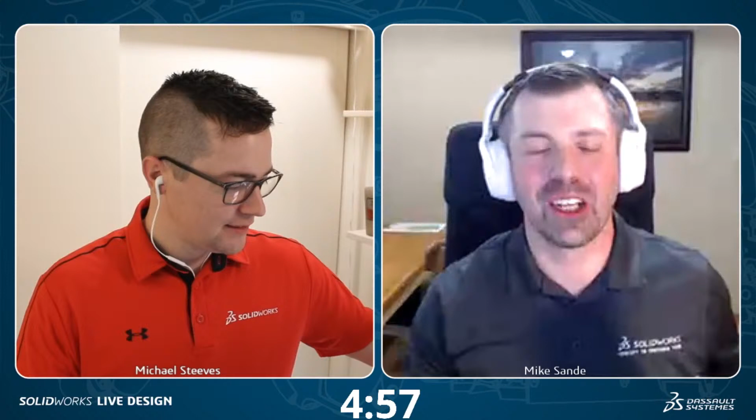Coffee water. Coffee. Some bean water. Electrolytes. Yeah. I do not have a backup today.

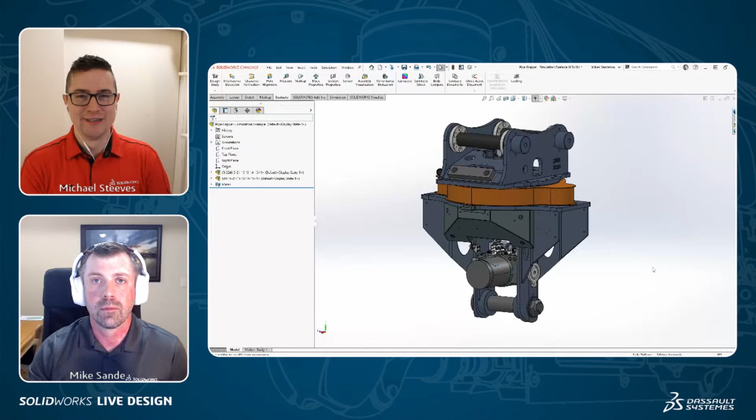Yeah, I'm thinking of some of the other projects I've worked on - the first one I think of is one of my first projects designing some lifting equipment. We weren't lifting pipes, but it was for lifting other heavy objects, and it needed, I think, a factor of safety of 10 for being an overhead device, and it was just amazing. Being the first project, the other engineers I was working with were attacking it in different ways. There's no way you can manufacture some of the things we were coming up with, right? Because that's the other challenge - sure, you can design it to be strong, but is it manufacturable?

So we can talk about that on a future episode. But yeah, today, like you said, it's all about - okay, we have an existing design.

We need to get some simulation results as fast and accurate as possible. I think of Model Mania. If any of you are familiar with it, it's a design challenge that's happened every year at SolidWorks World and 3D Experience World for over 20 years.

The situation is, you sit down, you get a drawing, you make a part. After you make that first part, you're given a change, and the fastest, most accurate time wins. Just got to go, right? I don't care, I'll hack at this thing. I just need to get the right answer because the clock is ticking.

And it's the same thing here. We have the production model, it's detailed. Now we just got to get this verification so we can go. We'll hit on all that.

All right, so should we take a look at the model? Yeah, where do we start? At this point, again, this is just a sub-assembly, but this is their production model. The first thing I always do when I'm putting on my analyst hat is really start to look at it.

If you've got a little background in CAD, you can start to look at how this is actually put together. This particular model, as we go through and investigate the tree a little more in detail, we see that they've separated out all of these plates to the stock material.

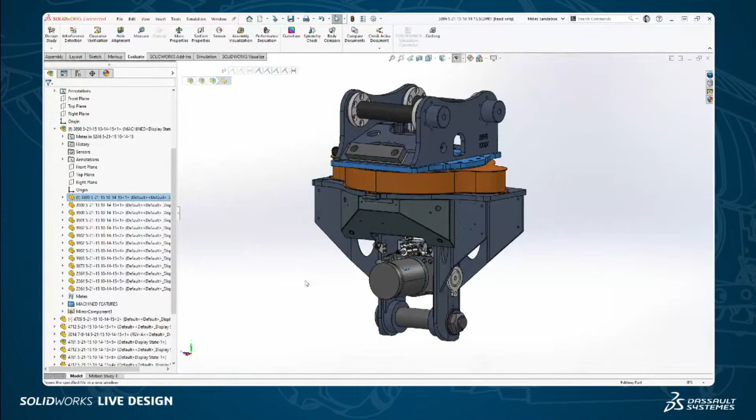So if I open up this particular base plate, this is a 2-inch thick, heavy stock material that they're going to use maybe a water jet, plasma cutter, probably a plasma cutter, to get this thing cut. 2 inches thick, that's crazy. I can't imagine what that thing weighs.

And then in the next level up in the assembly, I've got some display states that are going to be popping around here. You'll see that they've actually added all the machine features into that subassembly. So as an analyst, spend a minute and say, well, what can I right away get rid of, just by suppressing and so on. I'm going to skip this part because I want to make it a little more difficult.

This is a very well modeled assembly. They approached the weldment side of this thing correctly. They have the stock material, they have the machine components put at the right levels. It makes it manageable, but that's not always the case, so we're going to take a bit of a different approach. Just spend a minute, click around, take a look at it, see what's going on.

But the next thing I like to do is figure out my file management side of this with Sim. If we're doing that really fast, hack-this-thing-apart approach, we don't want to worry about making the CAD designer upset or completely blowing up the production model. So one way you can approach that is configurations.

I personally come in here and I'm going to do a pack and go. If you're not familiar with a pack and go, I'm working in SolidWorks 3D Experience, or 3D Experience SolidWorks Connected, so it shows as export SolidWorks files. On the desktop version, you'll be able to do File and just do a pack and go. Let me save this real quick.

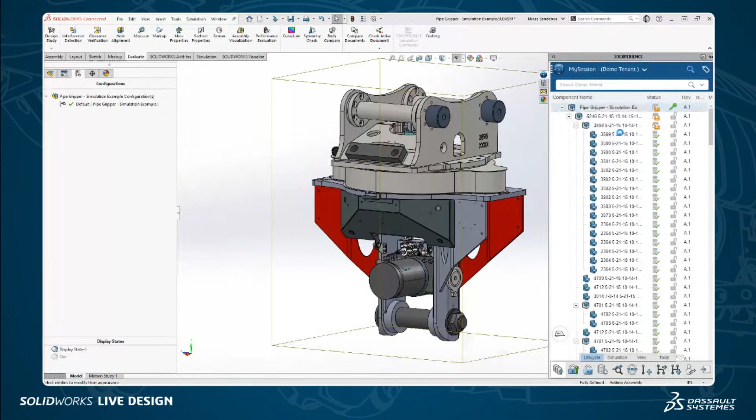That's a really good point, Mike, is that while you're doing that, the version of SolidWorks you're using is SolidWorks Connected, built on the 3D Experience platform. So your native save operations are kind of being done to that 3D Experience cloud platform. But you're going to go through some clicks, and I think you can call them out while you go through here, since I'm sure a lot of people watching use the traditional SolidWorks desktop. What would they click on as they go through it in SolidWorks desktop?

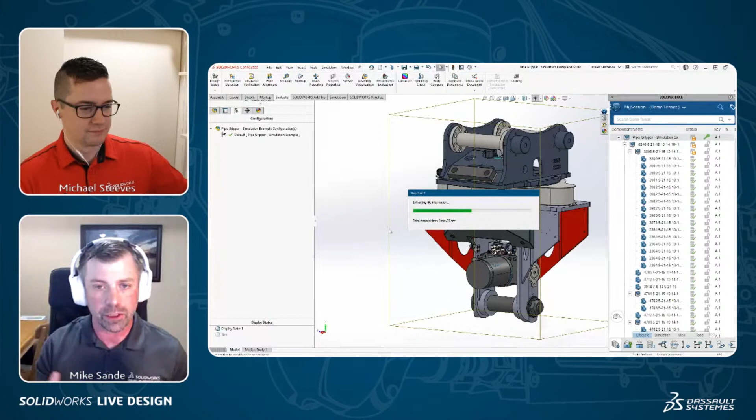I wanted to make sure folks out there using the desktop version get those clicks too. On this one, because all my data is on the cloud, that's what you're seeing on the right-hand side. The 3D Experience Connected side stores everything and has that version on the cloud, so I can get it anywhere, pull it down. Right now I'm just making sure this updated version reflects some changes I made this morning, that's why we have to make this save. But then I'm going to export these out.

So even though this connected version, which is still a desktop, this is running on my desktop, just connected to the cloud, to my PLM system there. Yep. We can still take and export this out. So the pack and go.

It's a really creative thing that happens there, in that when you have to do an export, it checks you. It says, well, if you want to do an export, we want to make sure that this is an accurate export. Like, have you saved the proper changes internally before you export this, so that at that time you have a one-to-one? But of course, everyone knows, as soon as you either print a drawing or send something out, it's kind of immediately out of date.

Yeah. But for this purpose that we're going through, sure enough, we're kind of ripping that out. We're going to be hacking and slashing away at it to do this as quick as possible to get to some simulation results. So this is going to be exciting. Yeah, it even just prompted me and made sure I reserved all the components. That way, if no one else was working on it, again, making sure latest and greatest.

So what you see here, this is the pack and go dialog. This looks the same on all the versions that are out there. But I always recommend go through and add a suffix to it. We're grabbing all these referenced files, and they could be all over the place on your server if you're using that, or in SolidWorks PDM, which manages those references. And I like to make sure we're creating a new unique name to those, and then putting this somewhere very safe. Again, we're trying to completely cut the tether to the production model, and we're putting that over.

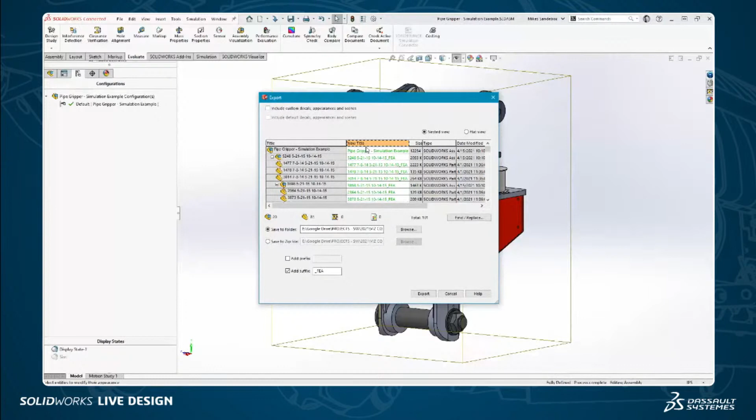Now, Michael, you and I were talking about why is this good? Why is this bad? And I think one of the things I really want to focus on is this method is really intended for that kind of ready to go to production. We need the final check in Sim. As you're evolving the design, simulation comes into play a lot of times to be able to do it with that design as it gets to this point. If it's just that final sign off, are we good to go?

Grab this. We're creating just a verification model to run the simulation, run the report, and then attach that over to that final. And you can zip that up, bring that over to the production model and have it as a reference as well. Yeah, and we're kind of approaching this internally as if this is our own company and this is the model that we're working on. But I could imagine, similarly, if you've contracted with someone out of house running the simulation, it's like, okay, pack and go, here you go.

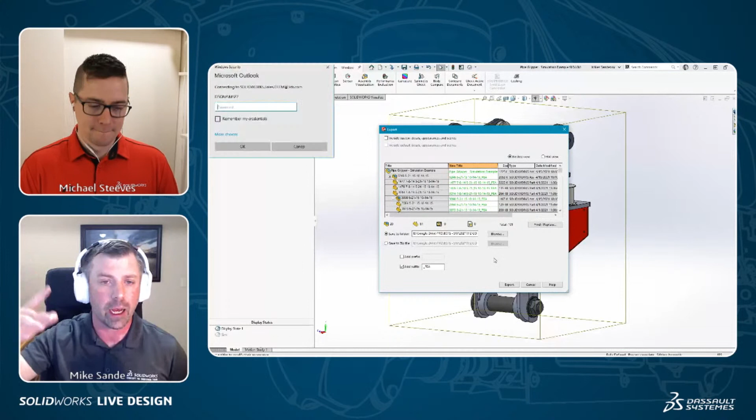And I can't count how many times it's happened to me that I receive an assembly file and it's just the assembly, it doesn't have the parts inside. So that pack and go is a great solution. Pack and go is the solution to package everything up, make sure you get all those references. Yeah, and you'll notice on the desktop version, there's some options too, like include toolbox components, include decals and stuff like that. So you can just make sure to walk through those as well.

So I'm not going to do this step. I don't need to. I just want to make sure you guys are all aware. It's worth the extra step in time. Save this out to a folder, to a zip, add that suffix, and just double check that the new title has been brought in here. So that's Pack and Go. Awesome tool. Has a lot of uses outside of this.

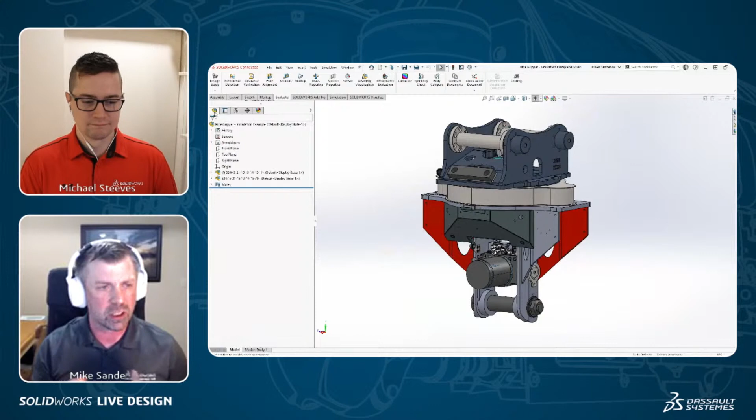Now, once we've got this ready to go, the hack model, right? Ready to really just dive in and tear this thing apart. I've looked at it. I've understood it. Where we started to go with this one, especially with the whole assembly, was suppressing out the components we don't need. And a lot of times it's just figuring out, what don't I need? A lot of times we're going to replicate fasteners inside a simulation. Large pins can replicate it virtually.

But in this case, if I zoom in, we have a lot of things like the hydraulic manifold. I'm not running a sim on that. The mass, when we're looking at tens of thousands of pounds of force, that hanging there is not going to make much difference.

Some of these are pins and clips. So all of that stuff, right? That's just adding complexity to the model that when we go to sim and we need to create the mathematical form, or you guys probably all heard the term meshing the model, you don't need it. It's just adding time and computational time and going to give you struggles. So we're going to get rid of it.

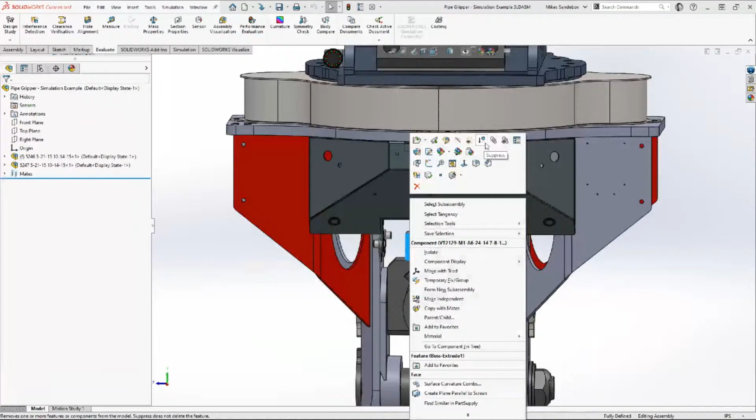Now, here's a trick that I learned. My first big trick to show is instead of going through and suppressing these out, which I think most of us would probably attack, what I'll do is actually hide them. The reason I start doing this is it's faster to unload these from your graphics card, which is hiding, versus having to suppress it, which is clearing it from the memory. In large assemblies, when you're doing this in bulk and you have a lot loaded to memory and you're unloading stuff from memory, every suppress, you're going to notice there's a little bit of a time.

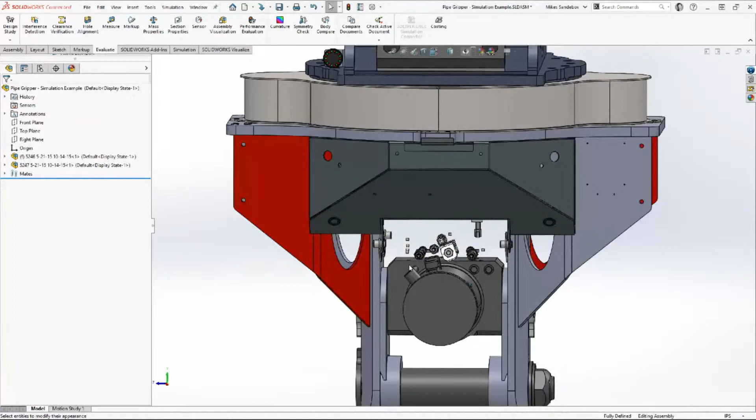Yep. So doing things like click on the manifold, I use a right click menu. You can take and hide component, or an awesome hotkey is just hitting tab. Tab and you'll notice, hide. Tab to hide. And you can start to just go through and tab out things you don't need. Like I'm going to replace out a lot of these washers we definitely don't need. And this is where you can start to be pretty quick.

Just tab, tab, tab. Then you get other tools like being able to do, for users out there, left to right select. If you're not aware, that's a blue box. Left to right or blue, that's everything inside. Right to left or green is everything it touches. So having that tool, right click and hide that out.

Again, just using my tab, and a combination of these, I can start to go through and just get rid of all of these components. It's a much faster workflow in large assemblies to get rid of the extra data that we don't need. So this is good.

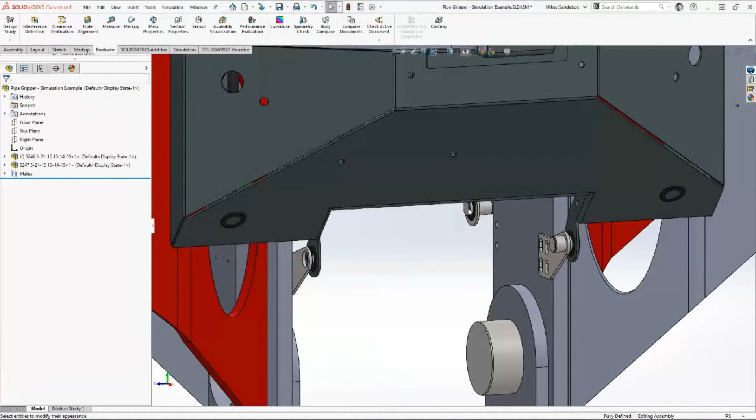So you talked about hiding components, but I just want to rewind for a second for every SolidWorks user out there. If you didn't know about tab to hide, and if you do, go ahead and give us a +1 in the chat. Or if you didn't know about tab to hide, just let us know that, oh my gosh, you can hit tab on the keyboard to hide a component.

But what's the keyboard shortcut to show? So maybe you get rid of something, and in this case, a big structural component. No, I needed that. Shift tab, right? So you hover over that spot, shift tab will bring it back. Just know those two: tab to hide, shift tab. And this works in multi-body, which we'll get to here in a little bit. But for me, I love using tab to hide. I use it all the time.

Now, Michael, I got one for you. What if you do a bunch and you don't even know where to hover over? How do you get those back? Oh, let's see if I remember the dexterity. Is it Control Shift Tab? Control Shift Tab. Yep. Got to hold it. And then you kind of get the temporary display of all those components, and you can click on the ones that you want. Yep. Right?

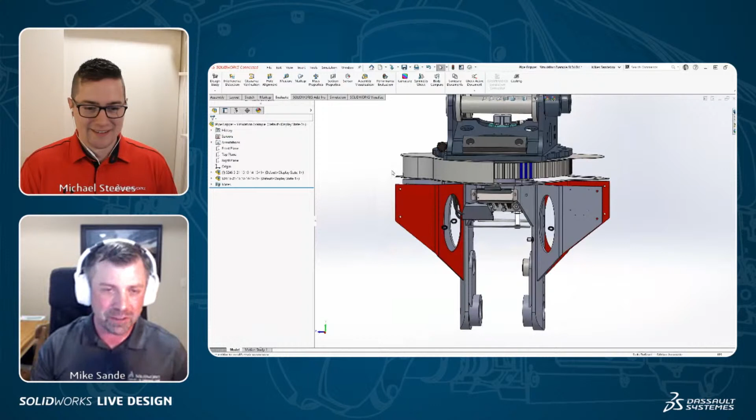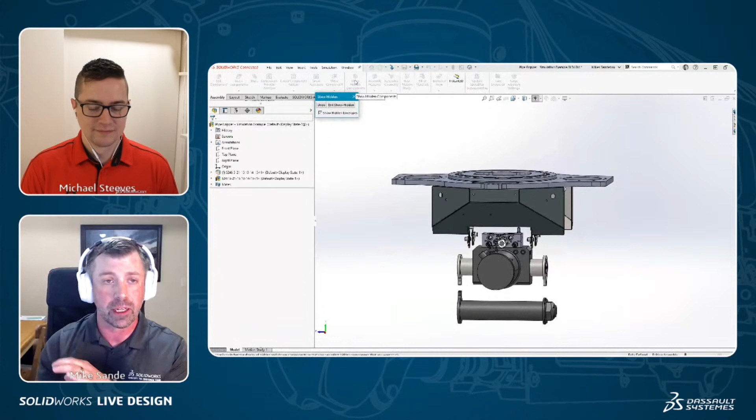Okay. That's right. So Control Shift Tab is a hotkey. And what that does, I'll do it again here, is that will temporarily bring up items that you may have hidden, and you can just click it while that's active. I think for the users that have been around for a while, you all know the show hidden components as well. So on my assembly tab, what this actually does is it inverses everything. And here's kind of a gut check. Did I hide something? Well, the main structural plate.

So once that show hidden is active, then when you select on a component, this will actually bring that back from that hidden state. So again, a couple different options: just Shift tab to bring it back, but you got to know where it is. So like I knew this one was right here. Control Shift tab to temporarily bring them up, or just the hide show, and then you can click them.

All right. So while you're cleaning some things up there, there's some good dialogue going on in the chat right now.

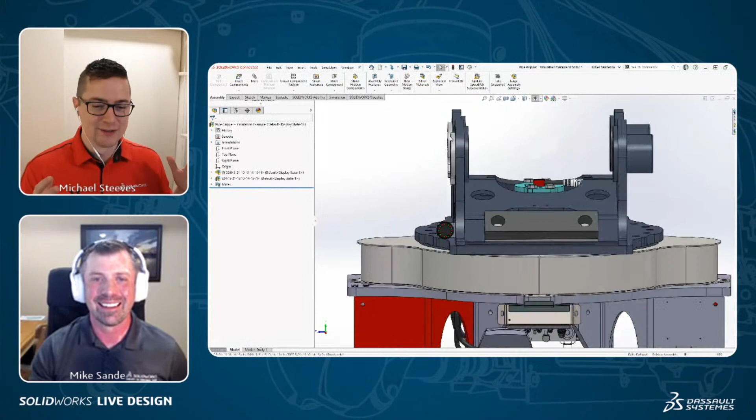Good. What's the best way to cut material? And I know Eric's in there. He's repping the Omax. That's actually something that we featured in a previous What's New. So you can see kind of a whole string of content in SolidWorks What's New using the Omax water jet machine, awesome technology.

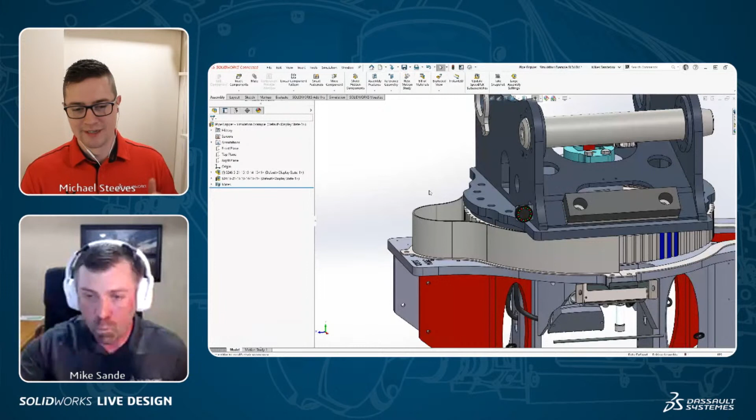Yeah, there's also, going back to the 3D Experience platform question of how secure is the cloud. If you have that question, Mondo, I see you there in the chat, head on over to 3ds.com. There's some white papers that talk about the security and how Dassault Systèmes is implementing state-of-the-art leading technology to make sure that, even if you're on the 3D Experience platform on the public cloud, if you set up your own environment, it is secure to you.

Of course, if you need additional security, there's on-premise solutions and different types of configurations for that if necessary. So it comes in different flavors, I guess I can say it like that, to hit the security benchmarks that you need.

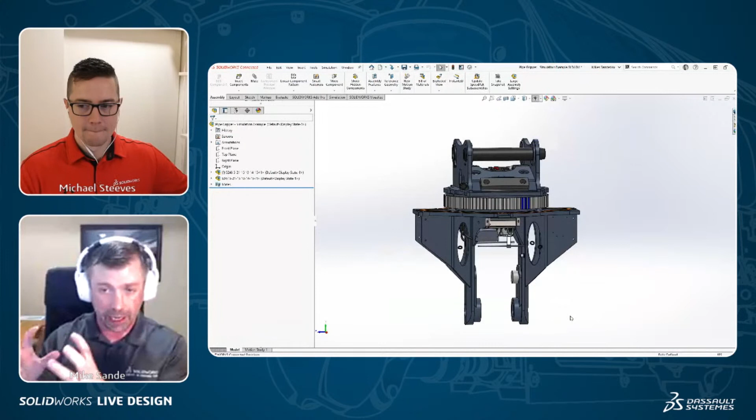All right. So Mike, there's a lot of small components in there. Do you have any other tips for how to easily select some of these components or find ones that we may not want? Right, because speed, we don't want to sit here and just tab. That method will get you a lot of the bulk stuff, right? This whole hydraulics unit that was hanging off the bottom, I can just window select that, tab out some of the bigger things. But I don't remember when I ran into these selection tools, which have been added to recently.

Even recently we had the select identical components, but check these out if you're not familiar with them. If you're using Toolbox today, you can just group and grab all your Toolbox items and do one big hide or one big suppression, select by Toolbox. I love the select by size. This is probably one I use very often. What this does is it looks at the overall assembly and it does a percentage of that size. I believe it's based on bounding box, but correct me if I'm wrong. I'm not 100% sure.

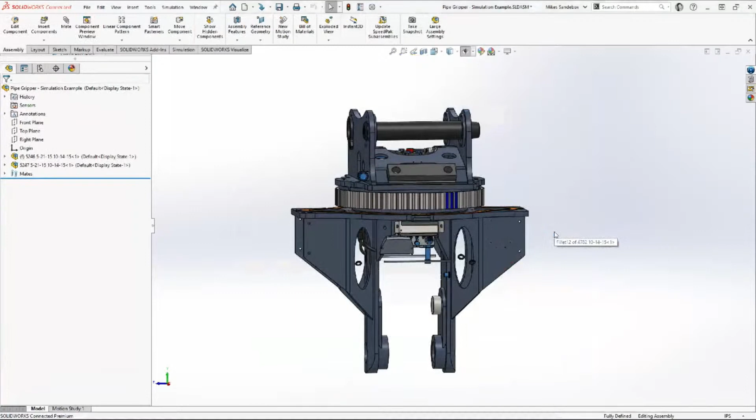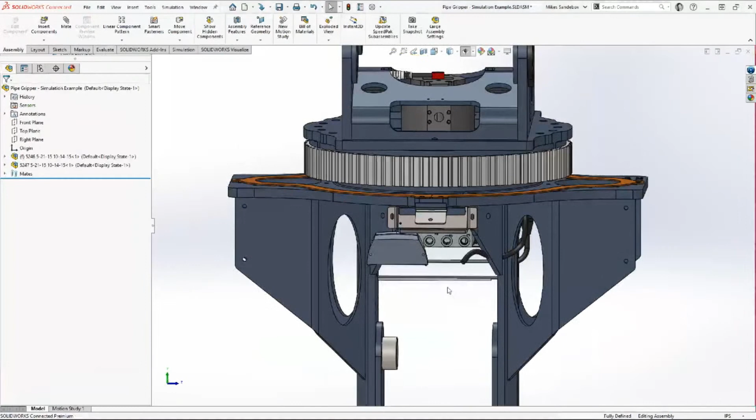But anyway, that will just grab any of these smaller components, which in this case, structurally speaking, we're not going to need. We'll need fasteners, but we're going to replicate those virtually in simulation. So I just use that select by size, and just like that blasted out a bunch of small little things, getting me down to going back to my tab key, tab, window select, and so on, to start to hide these out. So great question. Again, these are components that don't influence much the structural integrity of what we're going to analyze today.

If there's anything you question, bring it along, right? As we go through this workflow, my end goal here is to actually create another version of this, a multi-body part. So if you're questioning, do I need that or not? You can bring it into Sim. You can run an analysis with it and without and see if that actually affects the overall displacement or stresses of the part. So if you're questioning, hey, maybe this pin, does that affect the overall displacement? It might not. You can always bring it with you.

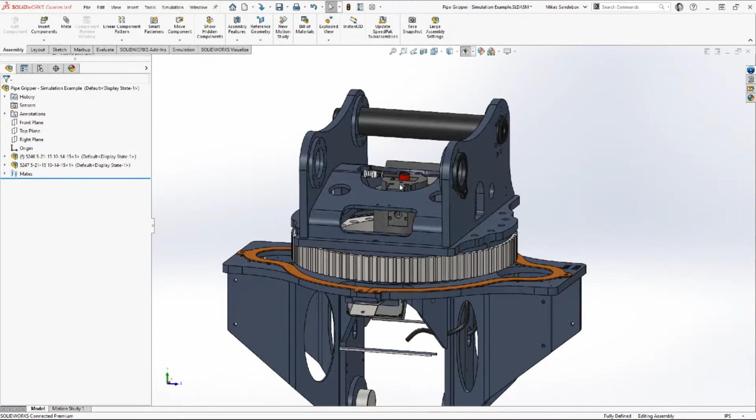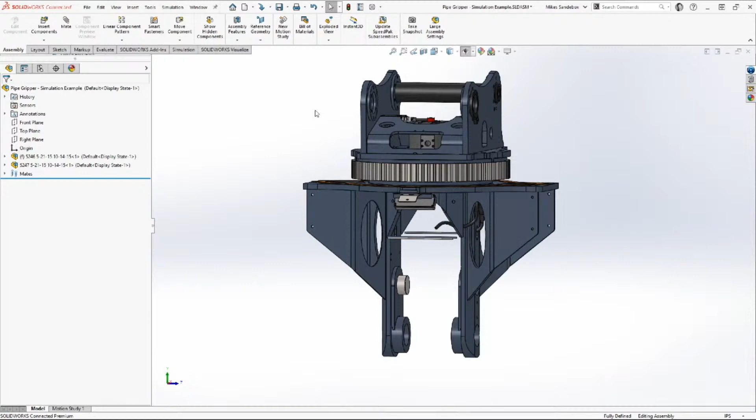Yeah. And as a simulation user myself, I've run into many cases where you start too complex and you're trying to troubleshoot the model. It's always easier to start simple and then add complexity from there. Would you say that's fair? Crawl, walk, run. Yep. Crawl, walk, run. In a sim, get down to your structural side of things. Let's get it to run. Are we getting some sort of results? Does it make sense? All right, now let's start to add in that complexity.

So Michael, we talked about the pack and go up front. I think another very common tool is to create a configuration. If you're doing part simplification for FEA, you got a complex single bracket, but you want to get rid of holes and fillets and those things, configurations are super awesome. In this workflow, what I found super handy, because we're hiding, is display states.

So if you guys aren't familiar, under configurations below that are display states, and these are really intended to manage the look of that, but it'll manage what's hidden and shown, which is what we care about on this workflow. It'll also manage transparencies and so on.

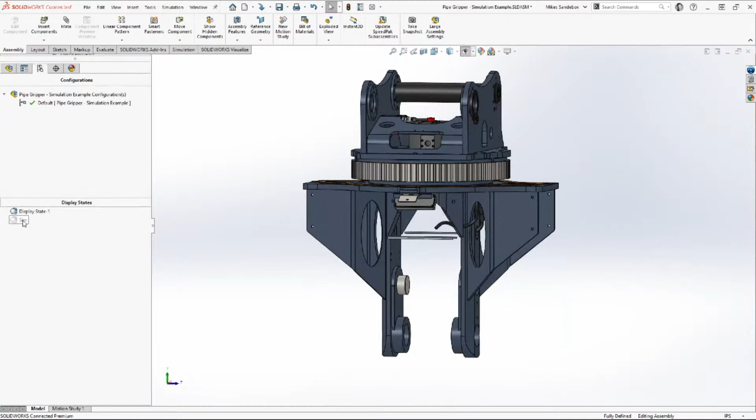So what I actually did is I created a sim display state right away, and I went through and hid all these components, and now I can toggle between that first display state, which would be everything shown, and now my sim display state, which is all of the stuff that I want to actually simulate. Well, it looks like it's even captured colors.

Yeah, so that leads me to the next part of this: we're going to create another part that we want to carry along in a simulation. What I've done here is I've added some red to these plates. I got two that are colored. We won't color the rest, but really the objective is, now that I've got it detuned in terms of complexity on the assembly side of things, I've got all that stuff gone. Now it's understanding how I want to set this up in simulation.

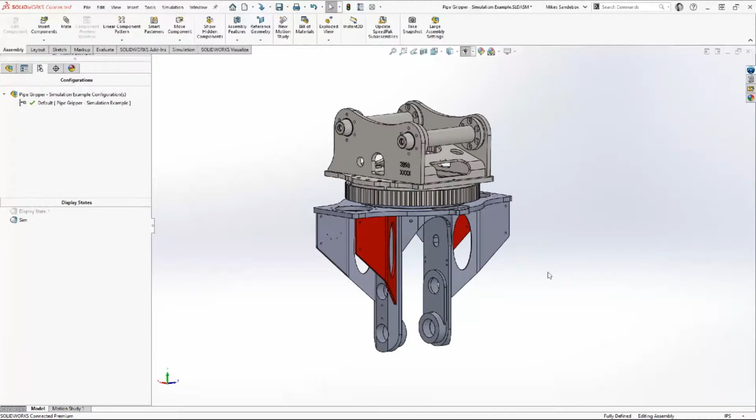And Michael, you're a sim guy. On the mixed meshing thing, do you want to explain that? I know you did a job with it. Just one moment before we get into some of the meshing conversation. I just wanted to plug display states one more time, because you're using it to control what's hidden and shown, and maybe do a little bit of color coding for managing the model.

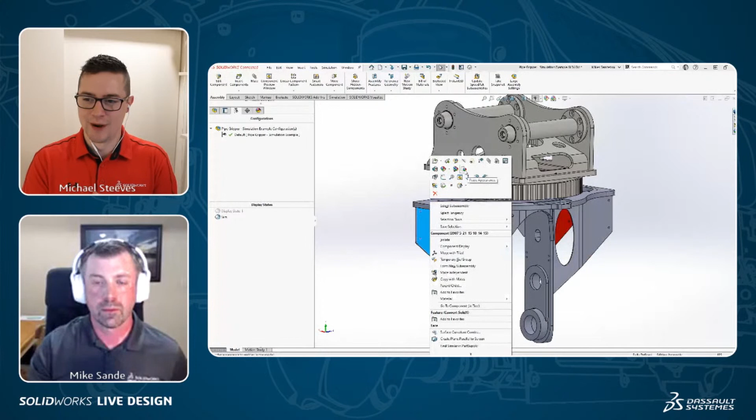But one of the other big benefits of display states is, I've seen many times, a lot of people create configurations when they're not necessary. Display states are a faster, lighter weight way to control hide/show as well as color states. Mike's doing some of that here. But if you have a product and you want to show how it may come in different colors, display states is the way to go. Like, I got a green version, a black version, a yellow version. Display states is an easy way to capture those visual properties without creating extraneous data.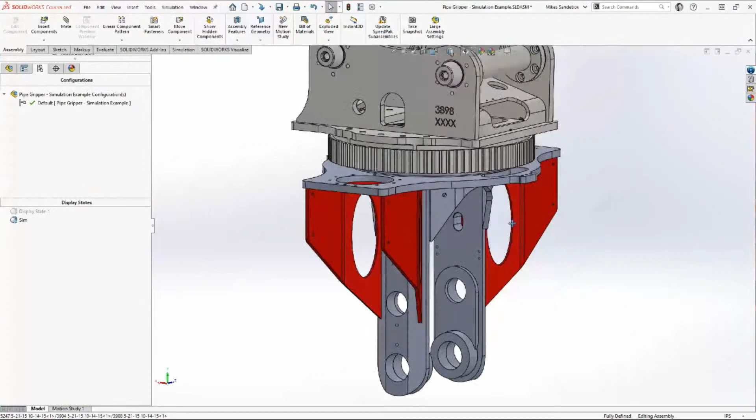They solve fast. They're very efficient. And in this case, I'm just kind of going through and saying, well, these plates, these ribs, are all about the same or they're all the same thickness. So stock plate material. So I'm just making a note just by coloring it red.

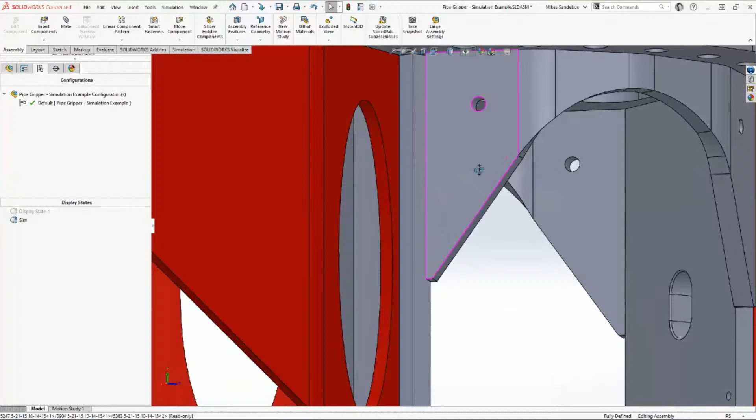This giant plate here, that was that 2-inch thick stock plate that came in that has actually been machined down. You can see how they've machined off the top of this, not uniform thickness. So that one's going to have to be a solid element. This plate here, this is all uniform. This is actually a 3/4 inch. So I may just take a second, come in here and grab that body.

You guys are learning how the appearances apply. This is a really nice little reminder of the hierarchy. So right now, part is at the very bottom as the lowest priority when these appearances come. So I can leave that gray on there. The actual body itself, then the feature, then a face, and then the assembly. That's how appearances override. So if you're ever playing with these and you're confused, I just colored this pink, it's not turning pink. Click on it. You can check the hierarchy and see where those colors are.

So in this case, like on the body, let's go ahead and click that. That'll bring up my appearances on the left. And we'll just say, hey, 3/4 inch plate, we're going to call that green. All right. And click the OK. And now that's applied. So this doesn't have a lot of different thicknesses to it.

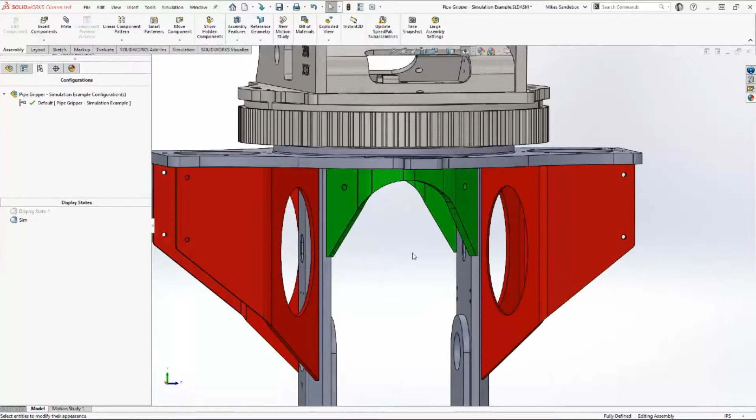But it's just kind of giving me a game plan, because my next operation is creating an actual surface body to represent those. So again, I'm thinking ahead. I'm not in simulation yet. You can do some of this in simulation, but we're not using a license yet. I'm using all CAD. And now I'm going to actually create a variation of these with some surfaces.

All right. Before you get into surfacing, Mike, I got to ask our audience, because we're going to cover some configuration in the SolidWorks options, and there's a setting there where you can change the open edges of surfaces.

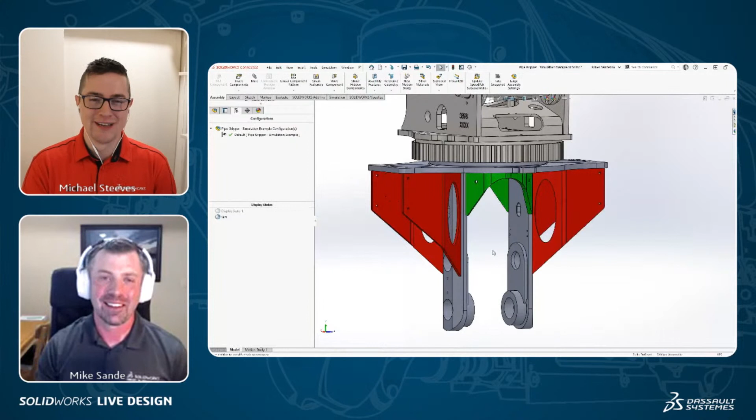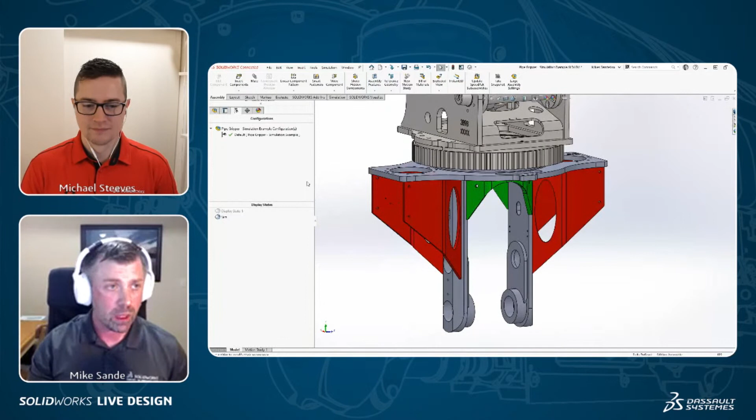So, just to back up, we've detuned this, got rid of all this stuff. Now we're starting to strategize our mixed mesh, solids, shells. What am I going to use to speed up that program? I've painted these to say, hey, this is 1/2 inch plate steel, 3/4 inch plate steel, make a note, go through. Now it really comes into creating that surface variation of it. You can do it in sim. To me, this is the better way to do it.

So what I'm going to do is come in and actually create a new part. We're not going to do anything to the basic one. And we'll just call this shells. We'll save that new part. And now I've got a part I'm working in context of the assembly. This part is going to build all the representations of the plates in that shell form, or that surfaced form. So when I say shell and surfaced, surface is the modeling tool that we use. It's a shell inside a simulation. So those work interchangeably.

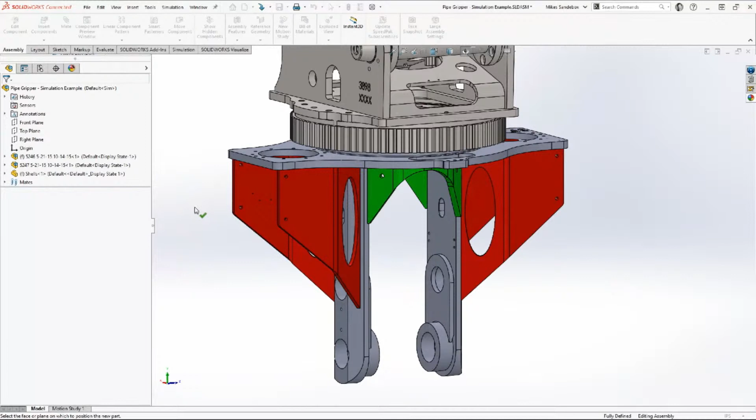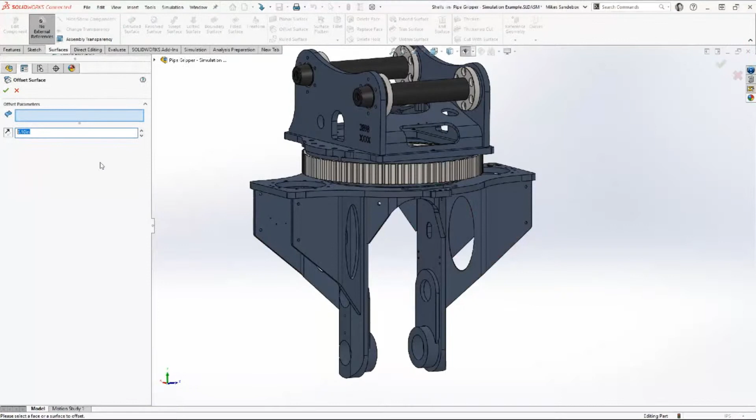So new part, I'm going to be working in context of this part. Let's give that a reference to the front plane. And right away, I'm going to come up to my surfacing tools, and I don't need any sketches. By default, SolidWorks always goes to that sketcher. And we're going to start using the offset surface tools. I don't know why I lost my display states, but we'll just work through it. I know what's going on here. Since we're editing in context, it kind of paints everything else backwards. And you can force transparency and do other things like that. But you're getting into some offset surface.

Yep. So on this plate, these flanges are uniform thickness, and this was a 1/2 inch plate. So I'm going to give that a 0.25 inch. What I want to do is create a surface right in the middle of it. Simulation, in the back end, in the math, will add that material, but we don't need to actually represent it in the mesh. They can do it in the equation.

Because at this point we've both run simulations before, but if you haven't run a simulation before, and we talked about these different mesh types, there's still this outline question that we haven't been able to show you yet of how do you define if you're going to be solid, if you're going to be shell, if you're going to be a beam mesh type.

Those options we can explore later on, but you can right click on components, you can define shell by a solid face, you can right click on something and treat it as a beam, or toggle it back to a solid. So there's different techniques there to work with.

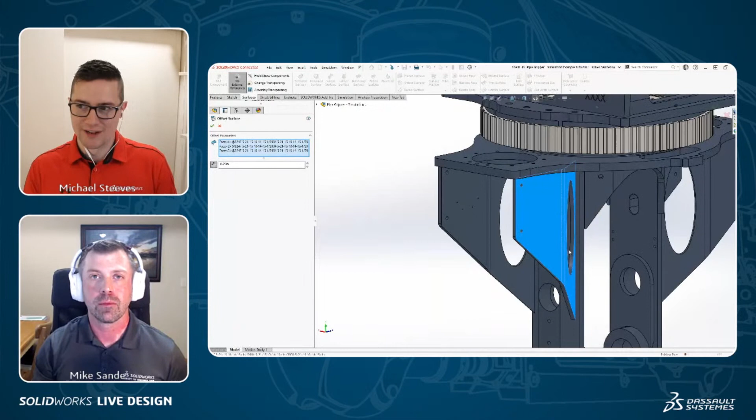What we're going through now is actually when SolidWorks simulation sees a surface, by default it treats it as a shell. That's why we're creating these surfaces. We don't have to go through other manual steps later. We're doing those steps now to prepare this model by creating some shells.

The other thing we'll show you with surfaces in just a little bit is we got to glue these things together, we're going to weld them in simulation. When I have this solid or this surfaced version of it, it's a lot easier for me to remember where to pick the edge because there's just one edge. We'll point it out too, but this is to me a really key part of the workflow.

So now it's just going through and grabbing what I know are uniform thickness plates that will be a great fit for a shell. And there are tons of threads out there on this.

You can get onto the forums, you can check engineering.com. We didn't invent shell elements or solid elements by any means, this is a common discussion in FEA. Just Google it, check it out if you're not sure, and you can learn plenty more. Obviously the SolidWorks simulation class goes very in depth into this.

So I'm going to go ahead and create one of those shells. Oh, hang on, I'll get it back. Yeah, okay, because it happens so many times where we get a pop-up and we move on, and then you ask the question, why wasn't it working? Okay, so let's see it again.

All right, here's a tip I want to show you though. Your enter key, if you're not familiar, brings back your last used command. That's really helpful here because it brings up that offset surface tool. Another tool I use here is the right click and then select Tangency. You'll notice it just grabs that whole tangency, come through again, make sure we're offsetting into the inside of the plate, and then click OK.

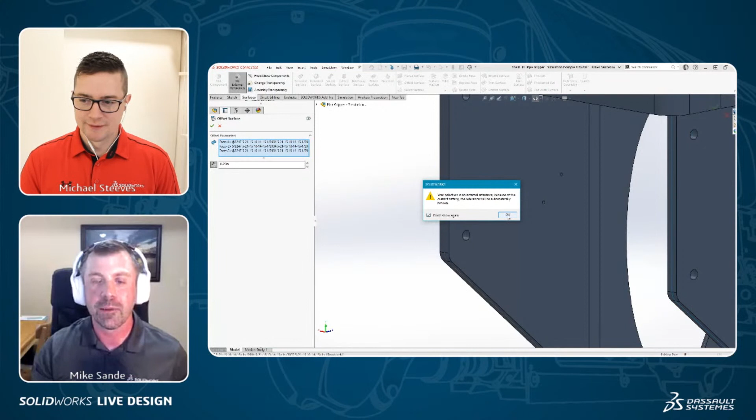I think best practices we often see when something is going to be released, you go through and break all of these external references. A lot of your CAD admins can kind of answer that, there's a lot of forum chat on best practices there. As a designer, I personally prefer to work with no external references on until I know I want that design intent, then I go in and turn it off, knowing that part's going to have design intent. So you'll get this, we'll ignore it for now. Yeah, that's a really good point because it's reflecting back on our initial challenge today.

It's all about performance and speed. Turning on no external references means that as you create other features and the model rebuilds, it's not having to check the assembly when it rebuilds these surfaces. It's just, nope, that's the surface, move on.

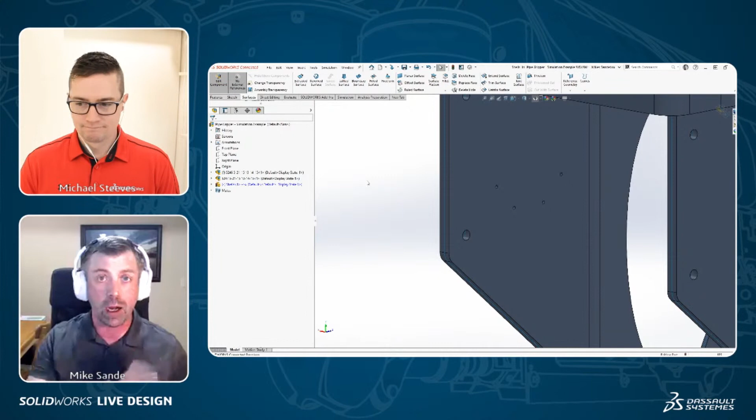So if you're doing this workflow earlier in the design phase and that assembly is going to be going through changes because you're doing the if-then type simulation—maybe the plate needs to be longer, wider, whatever—have that on and you get more automation. But this one, we just need to make sure that we're meeting that factor of safety of 5. So using these offset surfaces, I don't need to have that external reference turned on.

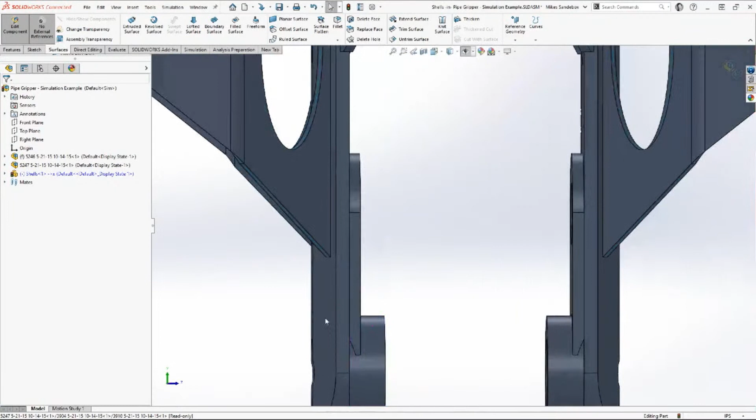Nope. All right, I'm going to create two more of these real quick. Again, just right click, select tangency. My enter key should bring that command back up—not doing that right now, no big deal. I'm going to do it for this plate as well. But what's pretty cool is, if we remember, one of the requirements was uniform thickness to use these. Not everything has that. The main tongue that comes down here, this main fork, is machined down. It's not uniform, so that one has to be solids.

So again, what's my strategy in sim? This one here, we could use as shells, so maybe shell that out. This part here won't do it, so there's definitely a mixed mesh—we need both the best of both worlds. This part here definitely could.

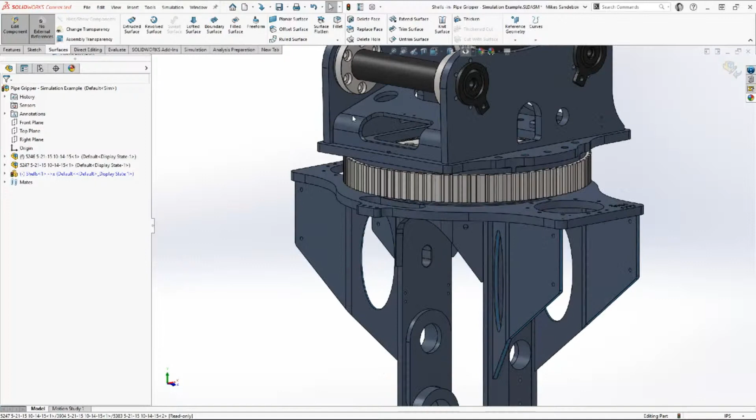Let's just do one more, and I'll show you what this is. It gets pretty cool. So if you are doing design where you're working with just a ton of stock sheet metal—sheet metal actually automates this whole process, but we don't have to get into that—what you can do is create this in-context assembly, start to create these offsets. And if we open this up, we now have this really nice variation coming together.

So I could go through and actually start building the whole thing up as a surface body. Now I've got this to use as my sim model. And if it's all uniform thickness, I could have skipped that whole defeaturing part because I'm just saying what I want for simulation. So opening that part is a good way.

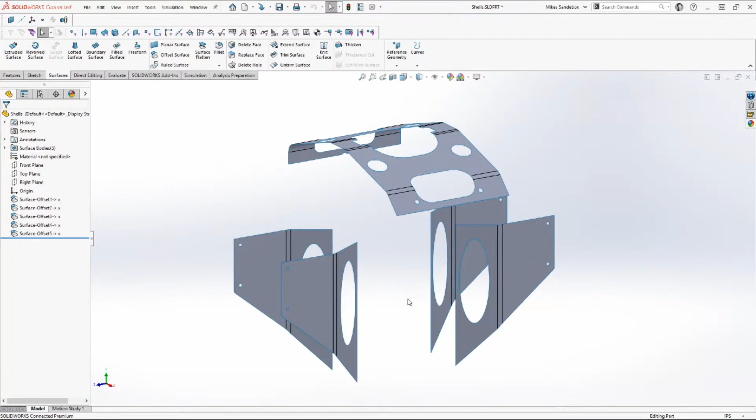I can imagine if you step away from your computer, either grab more coffee, hit the restroom, whatever it may be, other distractions at work, you come back—how do you know where you left off? Mm-hmm. We talked about some of those model edges earlier. Right now they're blue, and that's kind of the default color. Can we take a look at how a SolidWorks user would change those open edges?

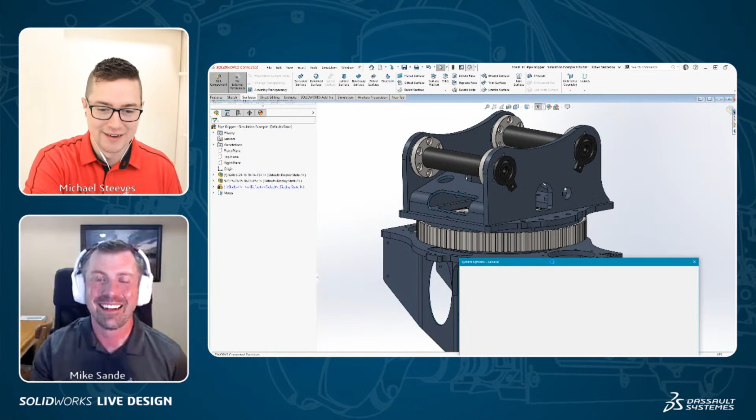Taking a look back, there was some—we've got a bunch of different colors that popped up. Salmon, you could do a salmon color. We could do bright blue—it's kind of we kind of have a bright blue there already. Bright yellow for open area edges. That came from Eric. Yeah, that's my pick. Yeah, Eric. Let's go for a yellow. Yellow stands out really nice.

So I learned this tip—this one's been around for a while, a lot of the power users know it. Jordan Tadich on our team taught it to me, who's a power surfacer. This guy knows sub-D, knows surfacing. So even if you're not doing this type of thing, inside of your system options under colors, there's a lot of cool colors you can change. There's some current color schemes you can modify just to do like a bulk change. But I always recommend poking in here. Some people like to change like the overdefined sketches too.

Scrolling down, let's see if we can go without flying past it. Oh, no, went past it. You'll see the surfaces, open edges—the default is this funky blue that really blends in. We were laughing about gray, right? That would be the only thing worse. So salmon is like, what do we got for? Is it more of a pinkish? Yeah, like a tan pink, I think. I don't even know—if anyone knows the RGB value, type it in the chat.

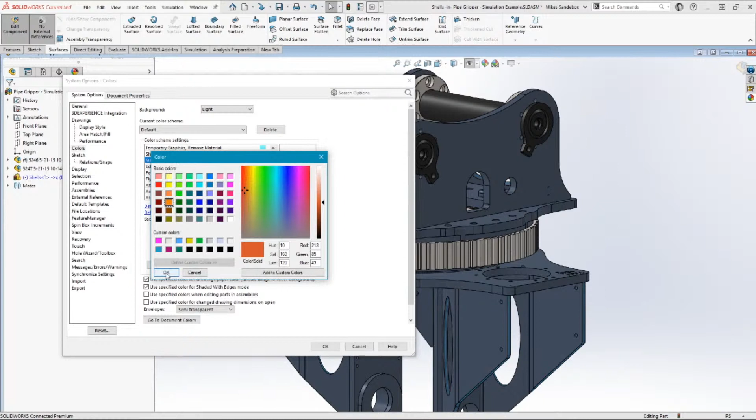Yeah, you can do custom RGB values there. That's probably close to salmon. Yeah, I don't know, let's go with that—kind of orange, more orangey. But what's really nice about this is when you set those, now we get a much better contrast on those surface open edges. Super handy, especially in surfacing tools.

Again, you want to close those when you're creating watertight models with surfacing tools. This is a nice visual indicator just to tweak so you can check the model. In this case, to your point Michael, I leave, I go get coffee. I could open that part or I could just say, hey, I can see where all these surfaces have been created.

All right Mike, so we got about 20 minutes left. Let's keep moving forward here, because we're still under this time crunch, right? We need to get to those results as fast as we can.

So what's next? Going back to the workflow I developed, or helped with, with Jesse, when we were trying to figure out how to quickly do this. So we've got something that's ready to go, but now we have things like small little holes that may cause problems.

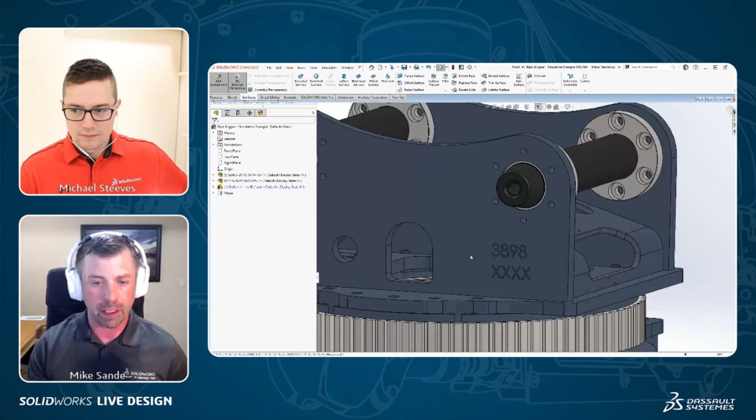You'll notice that we've got some embossing in here. If you really get into the model, if I can show you some examples, there's tons of these little fillets that are going to cause problems with meshing, because it's going to want to use a tiny little element to fill that.

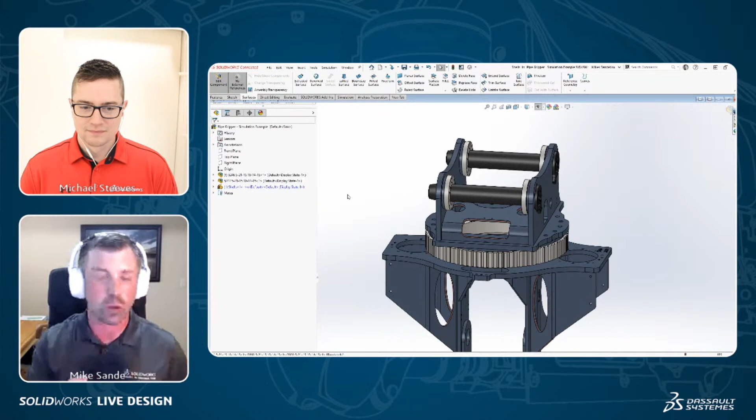That doesn't matter in the grand scheme of things, so getting rid of those is really my next step. And since we're in an assembly mode, we'd have to open the part, create a configuration, tweak it, or just, I guess we're in that pack and go version. So what I like to do, going fast, going quick, is just saving this out as a SolidWorks part.

If you're not familiar, under files save as, you can convert an assembly to a part file. And what that actually will do, I've got one already done so I'm going to just jump over here, is that converts it to a multi-body part.

There's something really interesting that happens there. We talked about this before, but just kind of keep us going here. When you do that save-as part, it's only saving out what is shown. So all that was the aha moment, right, that everything that you hid does not get exported when you do save as part.

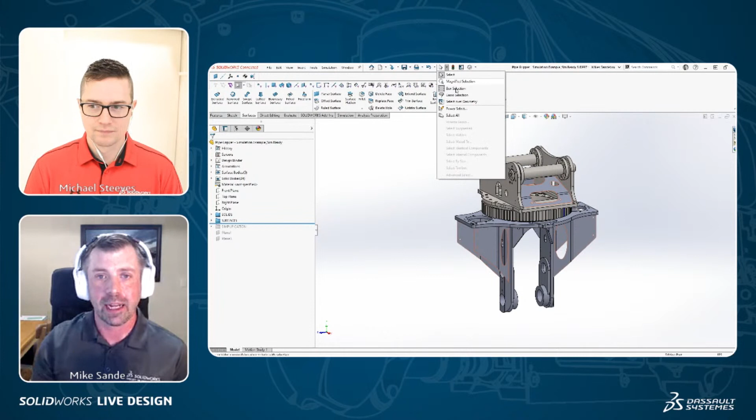Huge, yeah. So awesome. What we were doing up to that was going into your selection tools and saying select hidden and doing a bulk suppression. And then when we tested it without that and realized it doesn't matter if they're not shown, if the geometry is hidden, when you save it as a multi-body part, it only saves out the bodies that are shown. So that completely validated our no-suppression technique, made it a lot faster to get to this thing, which is our almost sim-ready model.

So Michael, the next thing really is getting in and, oh my God, I still have some work to do, but this is all easy stuff, right? We can come in and start to visually look at here. And I'm in a part environment.

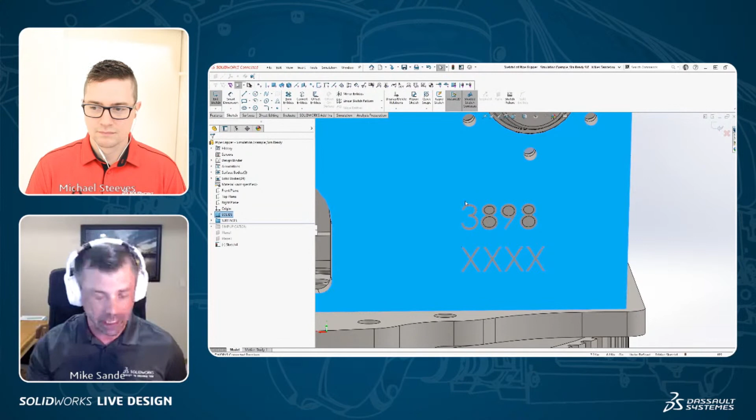Defeature this with just standard bosses and extrudes and so on. The other tool I'll use a lot inside of here, I'll point this out, look at the assembly tree itself. Because we did this export as a part, we lost the features, and I don't care. As a sim guy, I still have the geometry in a more complex form that I'm getting simplified.

So if you're not familiar with things like going through and doing a delete face, like this edge here, we may not need. The direct editing tab is awesome, it has got so many great features inside of it. Let me get out of that sketch, and we can just blast out faces. So I'm going to do a delete face on here.

Let's see, is there anything else I don't need? This is not selecting, I'm not sure why. And you can basically start cranking these out. So let's look through the simplifications that I actually go through, and we'll roll this forward.

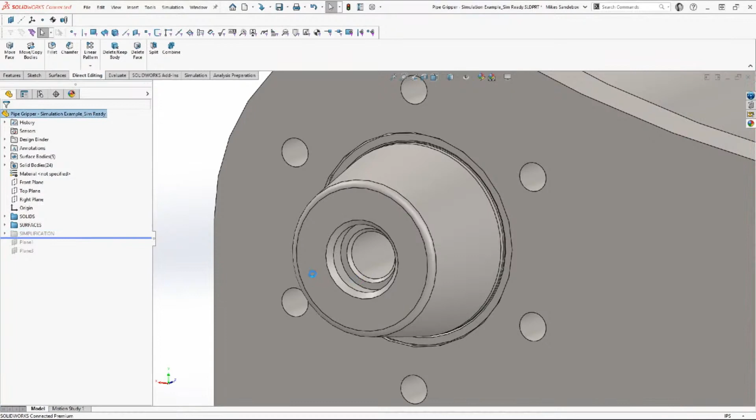And I'll show you. I think delete face is one of those that's great. It's a common direct editing tool. I know I used it even on the Simulia side when I wasn't able to use some of the automatic feature simplification of the model.

But yeah, delete face. And I think you can delete holes as well as some of these surfaces, right? There's a lot of these bolt holes and those types of things that we may not necessarily need in the model. So I think those are some great techniques to just simplify the model, get rid of some of those small details that are just going to increase the solve time but really not impact the results much. And of course, oh, go ahead.

I was just gonna say, because again, start simple. You can start with a very, very simple part, and then, again, crawl before you walk before you run with simulation. You can then add additional levels of complexity. So to understand, if they're lightening holes in the model, how much do they actually influence the structural stiffness?

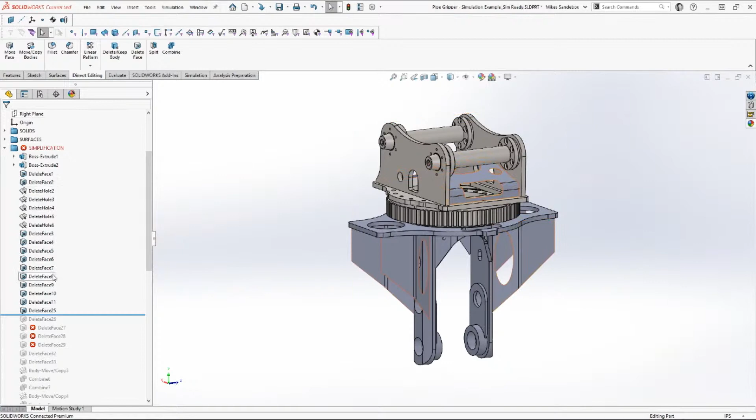Yeah. Great stuff. In terms of that, as we're simplifying, we're adding a feature to this multi-body, basically an imported multi-body part. And if you go through and maybe delete a fillet or a hole and ask, does that make a difference in the sim results? You still have a feature that you can suppress, remove that out, and do those if-then studies. So you still have that on and off switch.

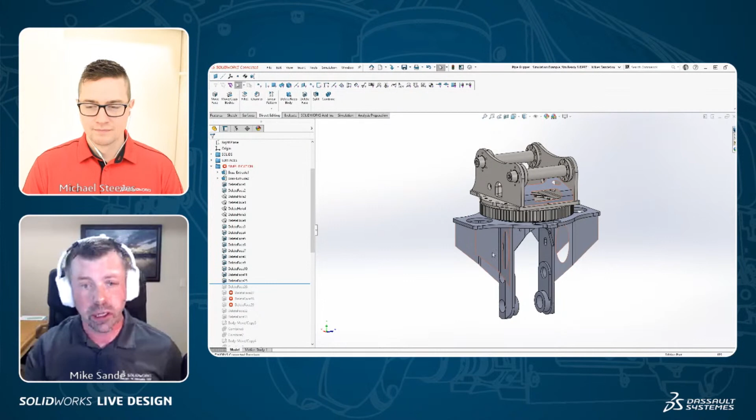So I just ran through, did a bunch of boss extrudes to get rid of some of the serial numbers on here. A great tip is if you have holes, like I had a bunch here, select the edge of the hole and click delete, and that'll actually just delete out the hole. Or Michael, you showed me the other day, they actually added delete hole to the surfacing tools. So if you have a surface body with a hole in it, you can click on the edge or use this tool, and that just does a boundary surface fill and fills it in, knits it, and done.

So the process really is kind of having fun here, coming through. I deleted out the bodies of each of the flanges, really started to walk through and figure out where I was getting issues and not.

All along the process of doing this, the other tool that I love and swear by, that you all know, but did you know that on the evaluate tab, interference detection, which used to only be supported for assemblies, is now supported for bodies? Michael, do you know the release? Chat, we need your help. When did we add support for interference detection to SolidWorks parts? All right, that's the question.

The other thing I want you guys to chat in about is we're getting some good support for the direct editing tools. What technique do you like the most for making some of those direct editing changes to the model? So just shout those out. We've got a couple ideas floating out there for SolidWorks 2018, 2017 maybe. Feels like it was later than that. But yeah, being able to do some of those body comparisons, really good.

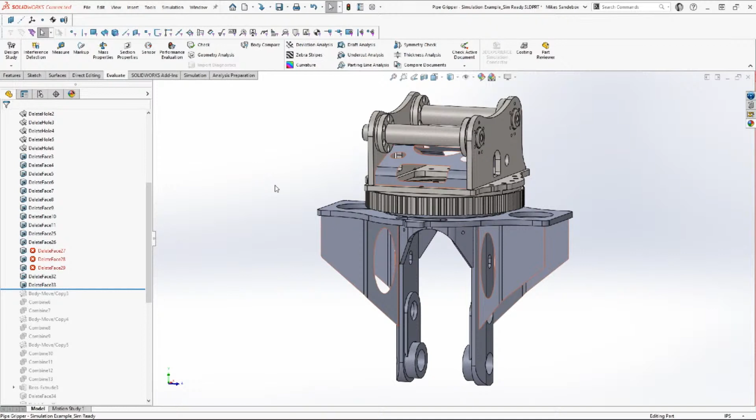So inside of here, interference detection, now that it's supported in multi-body, this is another area where you can run into issues down the road. Now, this is modeled very well, but it's also modeled with things like press fits. Where the connection is here, we have a tiny bit of interference, which is causing me some issues. So with interference detection supported for multi-bodies, I can get rid of all the small little things, and I can also check where we have these interferences and make modeling decisions as needed.

For press fits, we can simulate those if you want to look at the stresses induced by that in simulation, but for an overall structural run, I may not care as much. So things like a move face: if I zoom way in, maybe on this face, we just want to move that out 100,000th of an inch.

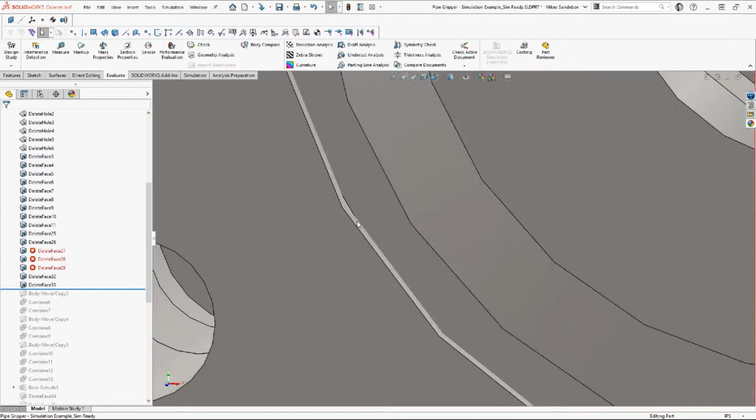Or what I like to do is just use some of the Boolean operations in direct editing. We can do a combine and actually subtract, which is a great tool. And that's what I did here: I would create a copy. So here, this is going to be my cutting tool. Think of that whole big plate.

And the copy command is just inside of our, again, direct editing. We have move copy bodies. If you guys aren't aware of this, it's pretty cool. You can actually create mates with bodies if you hit the constraints button. So there are mate settings to be able to do some basic mates, coincident, parallel, and so on.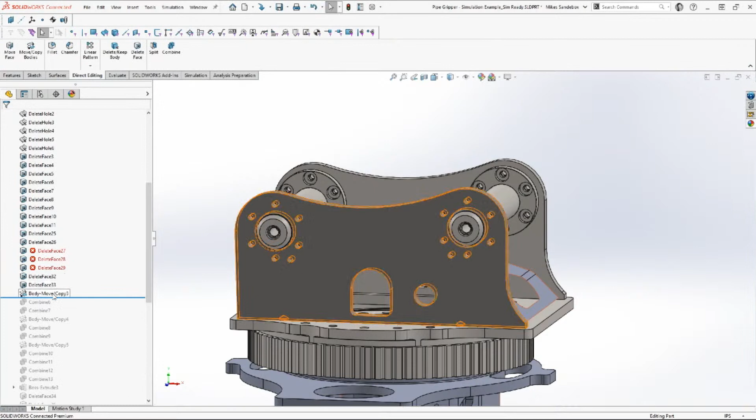But in this case, I don't want to translate it. I don't want to move it. I just want to say, let's copy this thing a bunch of times over, and I'll create however many copies I need, so however many interferences you want to get through. So that move copy actually created two variations of it.

And then I'm just using a subtract, which then goes through. And I just select this as the subtracting body when I want to remove the material, and I get rid of that interference. So in like a bearing, which is pretty easy, an extrude cut would work. A move face would work.

But you get more complex interferences that might be happening, and you're in a multi-body approach, copy that cutting body however many times you want to make a cut, because it deletes it. And then you're just going to do a combine subtract, which gets rid of those all.

The trick for that in an assembly, if you're doing a simulation on an assembly, is in the mold tools you can create a cavity, which does an in-context reference and knocks it out. So check out cavity as another way to get rid of interferences in mold tools.

So I just basically went through and did a bunch of these where I found them rolling through. Every now and then I'd go back and just do that interference detection and check it out. I actually just added that right to my little heads up toolbar, because you can add it to there now, which is, when was that added? I don't know. That is awesome.

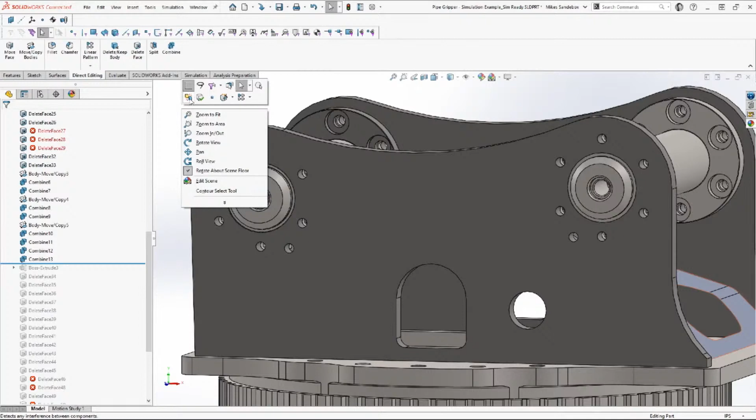Well, and if you wanted to customize it, you could just right click there in that toolbar, choose customize, and drag additional buttons and shortcuts that you want. Yeah, way easy. Every release of SolidWorks, I feel like we do incremental things to improve the user interface of SolidWorks.

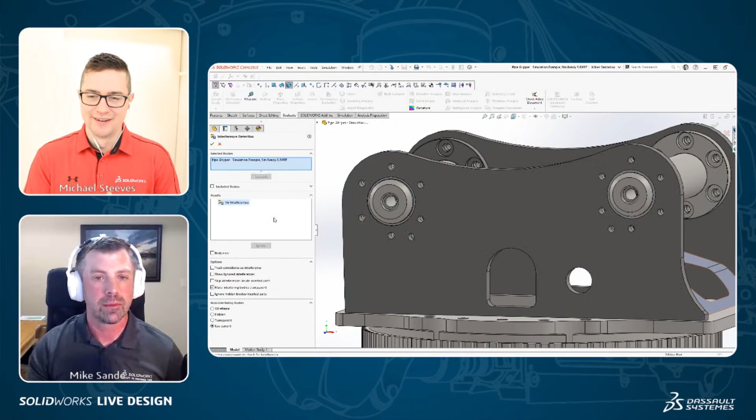And I feel like I challenge myself every year: you can hide the command manager, you can hide all your toolbars, because we keep improving what's available right at your mouse to execute some of these commands. So that's the walkthrough: check the interference, create some of those copy bodies, make some cuts, however you need to do it. Really, the goal is to get down to no interference.

And then at this point, everything looked pretty good, but the other one I always like to use throughout here is the check bodies. You'll notice I added that to my heads up toolbar. So we can run a check. Really what I'm looking for is this minimum radius of curvature. Okay. I run that.

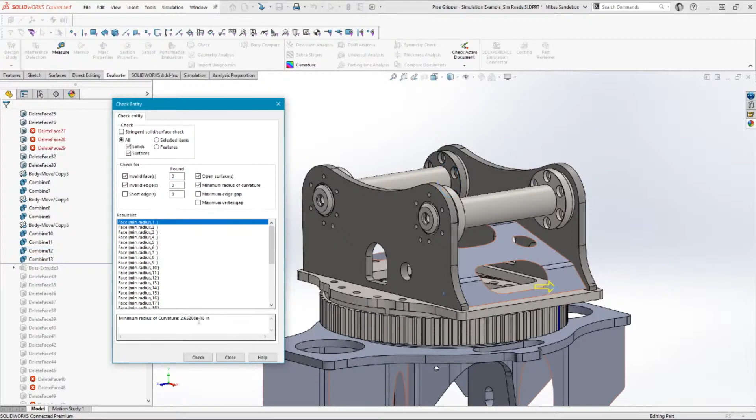There's a bunch in here, and we can start checking these out. Some of these values, I don't know if you guys can see those, but 3,000, not too bad. But you get into this. This is 2.6e-16. That's tiny. Not going to mesh very well. It actually used the hole wizard. That's just through a tap end of a screw there.

So delete face, right? So I can start to use this again, go through, find those out. I'm letting SolidWorks figure out where they're at, do a couple more delete faces to it, get a little bit further. All right, where am I at? Let's run another check. Oh, we got to turn on minimum radius of curvature. There we go. That didn't seem right.

But now at this point, I'm just really looking to see, do we have any of those really small numbers? 2 inches, 1.5 inch? No, looking good. Cool. So interference detection at this point, check geometry. This check entity tool is great for imported geometry. I run it all the time with that.

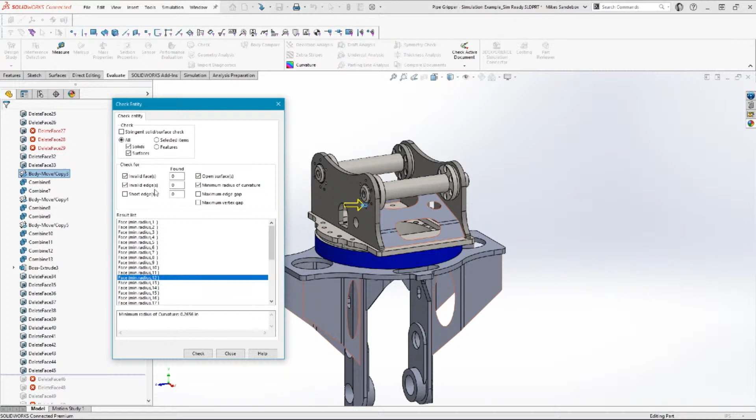Someone's handing you a part off, surfacing geometry that may be good or bad. Run this. You can take a look. Really, really easy way to analyze.

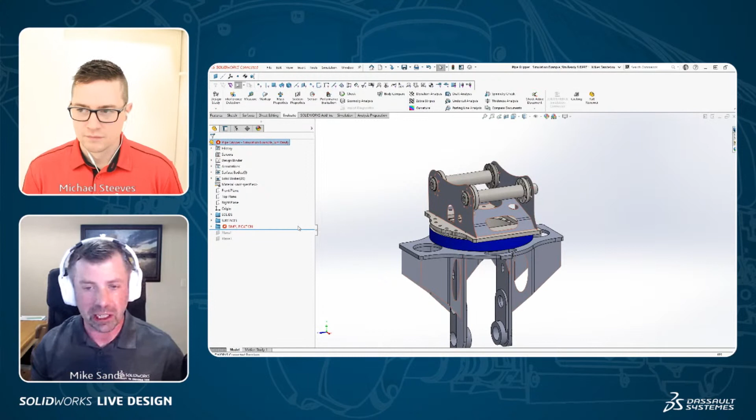All right, Michael, that's pretty much where I get to, right? We've gone through, deleted a bunch of faces, and in this model there were tons of little tiny chamfers and little tiny fillets that were all brought in here that we don't need in sim. I feel like the end is in sight. Are we ready to do a little simulation on this? Yeah, so let me jump over, and I'll walk you through the basic setup.

So again, the goal here was to get the final stamp of approval saying this thing will meet, it was actually an under the hook, ASME under the hook factor of safety, which by the ASME manuals is 3-to-1. This company did a 5. They wanted to be at least 5 on their load. At this point, it's defeatured, so I'll start my study.

I always do a draft mesh run, apply my materials inside of here, and this is how it came in, right? I've got all of these surface bodies automatically created, so I don't have any work there. SolidWorks surfacing tools make this a little bit easier. As Michael had mentioned earlier, you can still convert here, but don't have to, right? Those are all done.

I've created some fixtures. I put those up top here. That's where it's being loaded from the top of the arm. 30,000 pound force. So we've got a big beam that we're going to be moving up. That maximum peak force is what we're solving for. Will it mesh? Should we try it live? Will it mesh? All right. We're going to try it live.

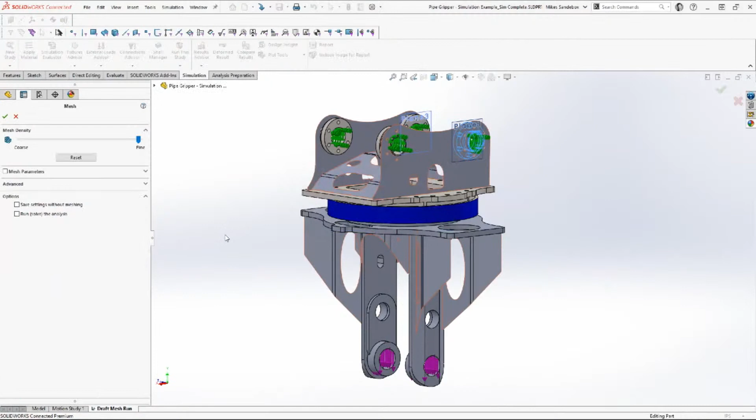So then we go through, and really what we want is making sure that this thing will mesh. There's some great tools built into the mesher. We have different variations of meshes to try. A lot of times it's just leveraging things like that check geometry and just saying, what's the smallest radius you got? And that's often a good place to say, that's the smallest element I want to use.

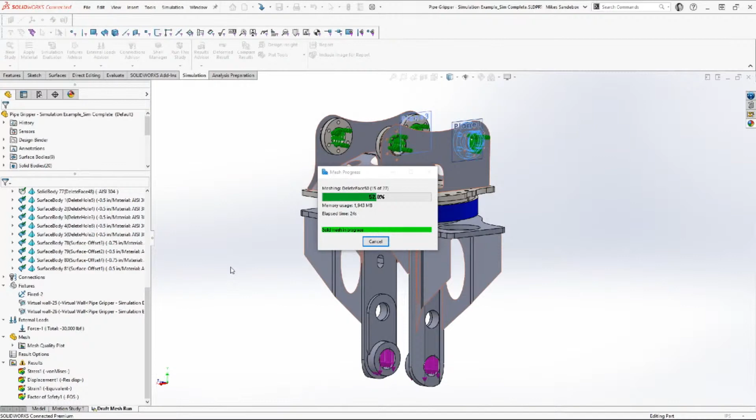Yep. If you're using plates that have non-uniform thickness, you always want to have at least 3 elements through there, so you can measure those and say, well, my thickest plate is 2 inches, 2 divided by 3. That's the smallest element I want. Again, this is all taught in the sim class, and there's plenty of discussions around it. But my goal was to be able to create a mesh pretty quick. We're at 40 seconds, and so far it looks good.

All right, cool. Look at that. We got the mesh. Beautiful. Just want to shout out real quickly, Andy Barnes brings up a good point. If you're doing shell or offsets, or maybe you're doing some plastic parts with shell offset surfaces where sometimes it fails, that check entities tool that you showed earlier is a great way to look at the minimum radius of curvature to easily identify some of those sources in the geometry, why it's going to cause some issues.

The other question that comes up here is, when you have the mesh, we see in the simulation tree there, a lot of them have materials applied, and the solid part thicknesses are automatically accounted for. But with those shells, those surface bodies that we were working with, we have to define that thickness value.

Mm-hmm. Right. And I think that's one other reason it's interesting, with the way this was modeled up in the assembly, was sheet metal used to model those components? Probably not. No. All weldments. That's another smart thing that SolidWorks simulation does: if you model some of these plate parts as sheet metal, SolidWorks simulation automatically grabs the thickness and treats it as a shell. So that's a great way to leverage some of that lightweight technology.

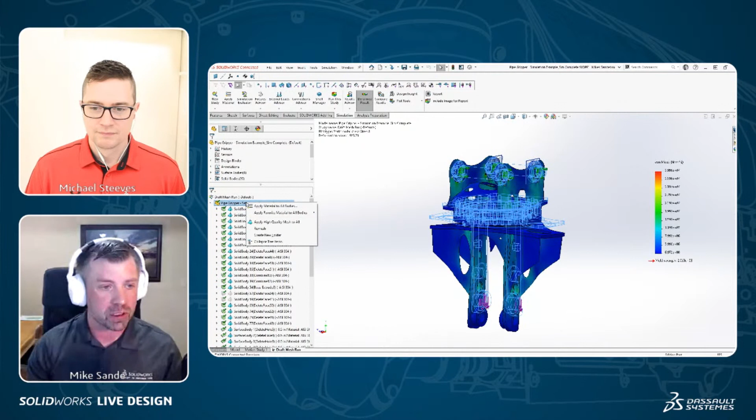So even though sheet metal offers some automation, when we look at these shells, I grab my notepad, I look at, yellow was 0.5, green was 0.75. The shell manager is a nice way you can open up, and then you can start to do what-if scenarios saying, hey, let's change all the 0.5 to 0.75 and see what that does, or 0.4 or 0.2. And you can actually modify these and say, what is our optimal plate thickness that still gets us to our design requirements or factor of safety requirements.

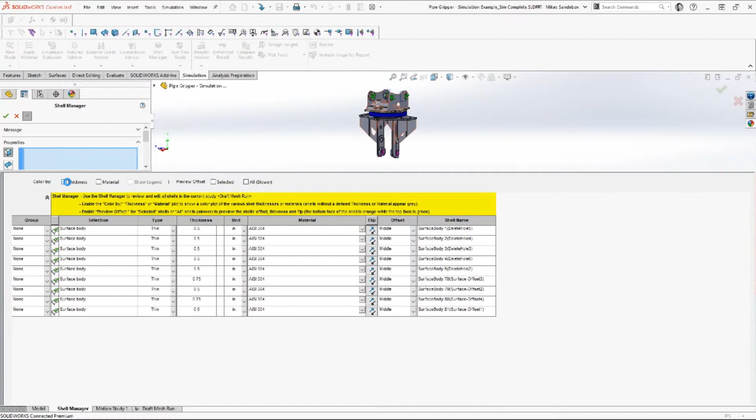Reminds me of that color coding too, where we have thickness and material. There's excellent options there to group these components visually to understand what's going on in the model. Yeah, and this is actually where I got that color coding idea from. I thought, well, why can't we do that in the CAD side first to organize this? Because this does it automatically, which to me is a really powerful way to do it.

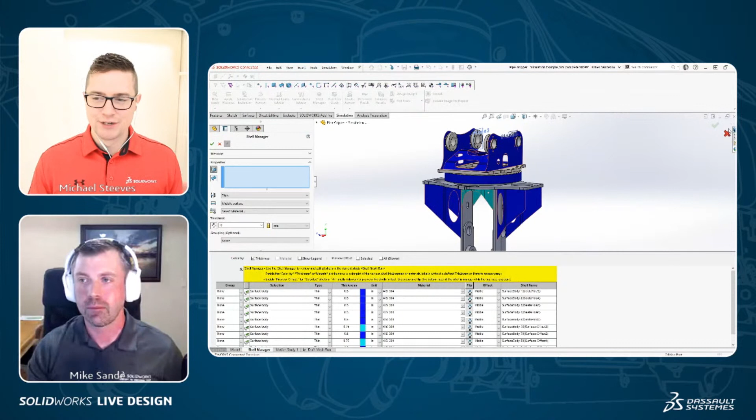All right, Mike, so let's start to wrap this up. The outstanding question is, did we hit our factor of safety requirement? Well, let's take a look. So we were going for a minimum factor of safety of 5. And if we do this at a global level, so close. 4.89. I think I changed the material thickness somewhere, but now I know we can go through. I can toggle some of the thicknesses of the flanges, see if going up or down, or change material in what-if scenarios, and so close.

Awesome. Well, great. And that's the thing. It's like, well, we can't change the design, but is there something else, a thickness change, or maybe a material, for instance, that you can toggle between? Because creating a design is challenging. It's not a trivial activity. There's a lot of requirements to meet. If it has to fit inside a certain space, how can you achieve some of the safety factors like we're trying to achieve in this case?

So, great workflow, Mike. Not surprised. I knew you could do it, bringing us from a complex model down to something simple and lightweight that solves very quickly inside SolidWorks. And this is SolidWorks Simulation here, available right inside SolidWorks desktop. Also in this version of SolidWorks Connected, that's built on top of the 3D Experience platform. So great work, Mike. Any last comments before we wrap this up?

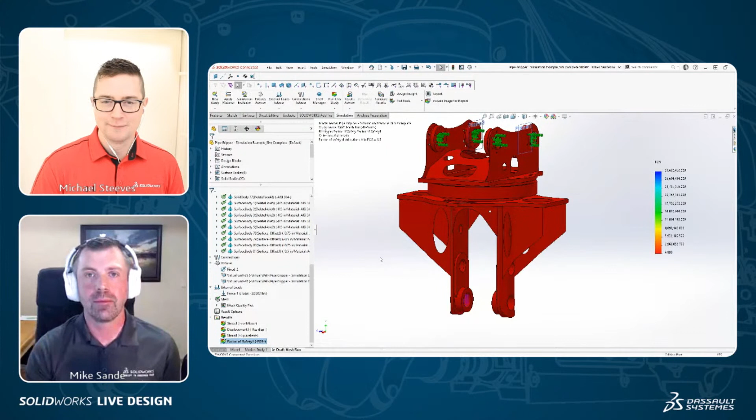All right. I've got some comments. I think the big thing with this one is there's a lot of different ways to get to the end result. Take what you can, grab some of the features that I showed, the pro tips that I showed, use them as you need, and start to play with your own ways to get to this result.